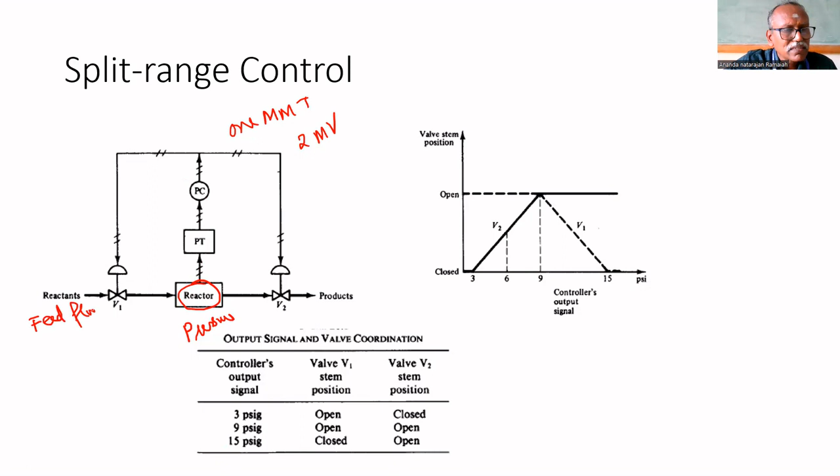But you reduced it to the minimum level. Let us assume you reduce it to the minimum level, and then also the pressure exceeds. What we can do is open the outlet valve. We can open the outlet valve more so that the pressure will not exceed the maximum limit.

That's why there are two manipulated variables. One is V1, another one is V2. Both are valves. If this opens, the pressure will decrease. If this closes, the pressure will decrease, because the feed is decreasing; that's why the pressure will decrease.

So this valve, for an increase in controller output, will close. Therefore, this is air to close type. As controller output increases, this will close. This has to open as controller output increases. That's why this is air to open type. This valve is air to open type.

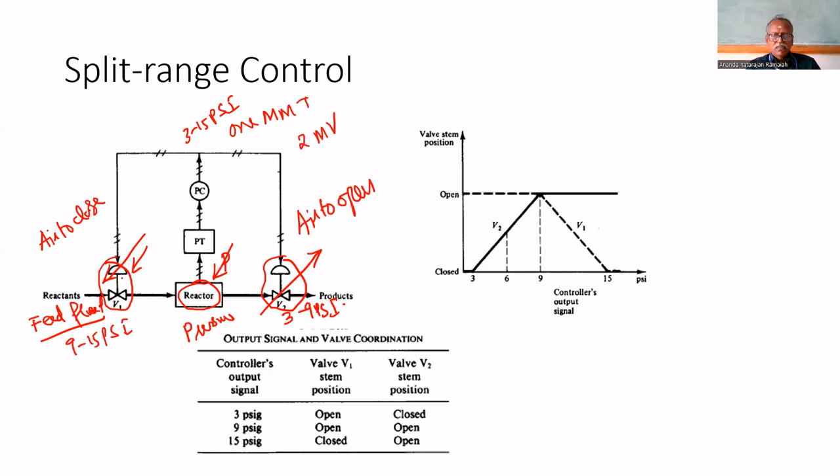But this will work for a range. Total range is what? The controller output is 3 to 15 psi. Total range is 3 to 15 psi. This valve is calibrated for 3 to 9 psi. From 3 to 9 psi, V2 will work. From 9 to 15 psi, this will work. So V1 is completely open.

Initially, completely open, because for 3 to 15 psi, from 3 to 9 psi, completely open. For 9 to 15 psi, this side; for 3 to 9 psi, it opens completely. Yes, completely open. This is air to open. That's why if it exceeds 9 psi, it will be completely open. This is 3 to 9 psi.

V1 is working for 9 to 15 psi. That's why from 3 to 9 psi, it is completely open. This is completely open for 3 to 9 psi; from 9 to 15 psi, this is completely open. Now let us see how it works. Let us assume that initially the controller output is at 9 psi. Both are completely open.

It is at the nominal operating point. Suppose the pressure exceeds beyond the safe level. What will happen? This is completely open after 9 psi. You cannot do anything; you cannot open beyond 100%. That's why it is completely open. Outlet valve V2 is completely open.

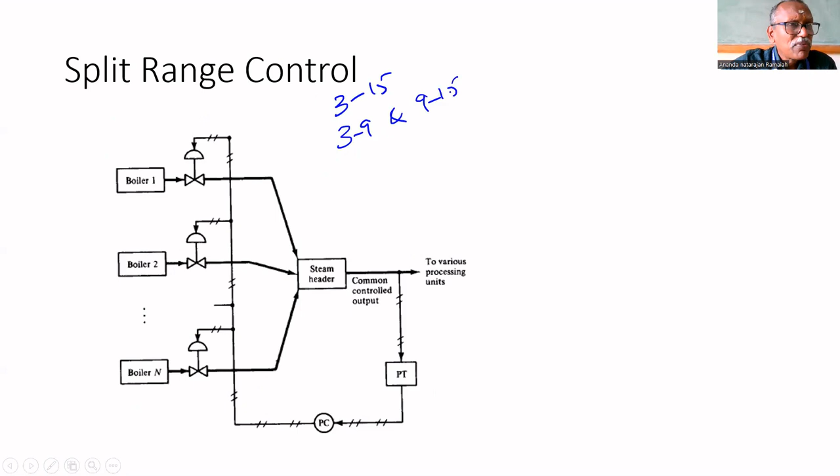Another thing: a split range controller need not be only two. Here, 3 to 15 psi is divided into two parts, that is 3 to 9 in the previous case, and 9 to 15. Only two valves are there in the previous case. It may be increased to 3 also. If you separate this into 3, this span has to be divided into 3 parts. 3 to 6, then 6 to 9, 9 to 12, then 12 to 15. Like that, you can separate: this is for V1, this is for V2, this is for V3, and this is for V4.

So here, this is a steam header. Steam header means steam will be collected from many boilers. Let us have 4 boilers: boiler 1, boiler 2, boiler 3, and boiler 4. Let us assume boiler 1 will start opening from 3 to 6 psi. After 6 psi, it will be completely open. This will work for 6 to 9 psi.

So this will work after 9 because it depends upon the demand here. On demand, the pressure will drop here. As pressure drops, boiler 1 is completely open, but pressure is not sufficient. That's why boiler 2 starts opening from 6 to 9. That is also completely open. The output signal from the controller is 9 psi. The pressure inside the header is not sufficient. That's why boiler 3 starts opening from 9 to 12 psi. Again, if it's not sufficient, the fourth one will start opening from 12 to 15 psi.

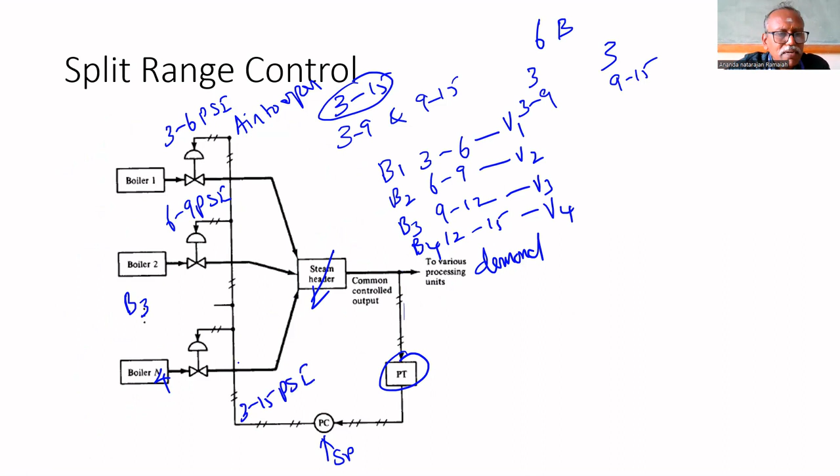So anyhow, the output of the controller is split into many spans, and each valve will work for a particular span. In this case, all are air to open. In the previous case, V1 is air to close and V2 is air to open. Here all are air to open. So here the pressure transmitter transmits the pressure available in the steam line. Based on that, the pressure controller will give control output from 3 to 15 psi, but the valve will work according to the output range of the controller.

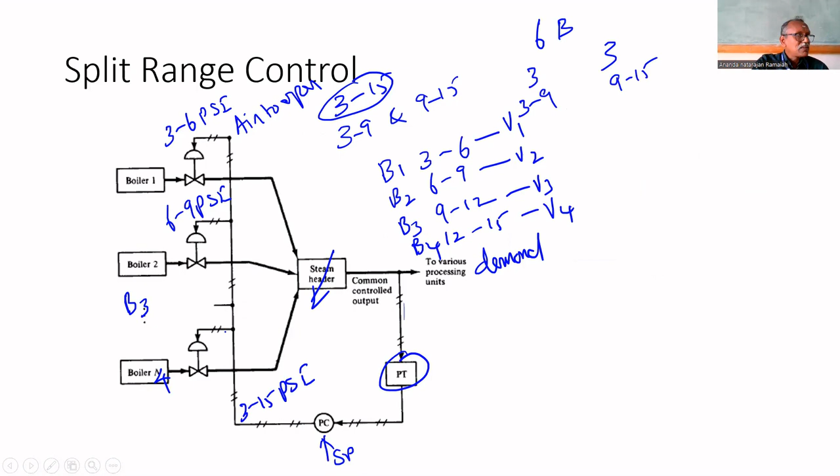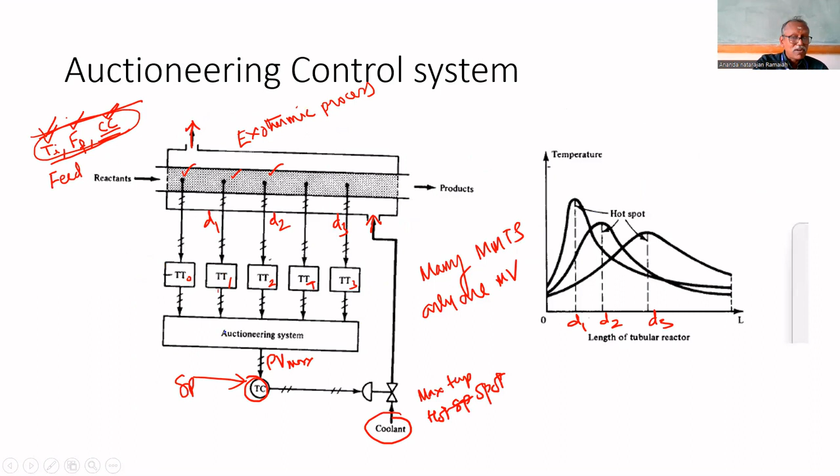This is all about multi-loop controllers. A multi-loop controller may be either single measurement, many manipulation, like split range, or many measurement but only one manipulation, like override. Here, two measurements, but only one manipulation. Here also, two measurements, one manipulation. So these are all examples of multi-loop controllers.